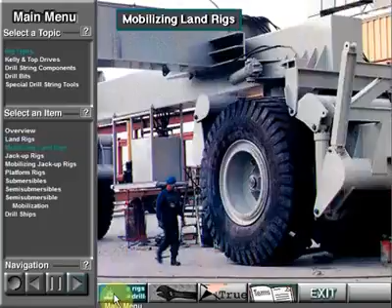Crew members can move land rigs on trucks, tractors, trailers, barges, helicopters, heavy rolling gear, skids, and, in rare cases, specialized air-pressurized equipment. Small, light-duty rigs are pretty simple to move. Ultra-heavy land rigs can be difficult to move.

A jackup rig drills offshore wells. It has legs that support a deck and hull. When positioned over the drilling site, the bottom of the legs rest on the seafloor. Jackup rigs can drill in water depths ranging from a few feet or meters up to more than 400 feet, over 120 meters.

Boats tow a jackup rig to a location with its legs up. Once the rig-up crew gets the legs firmly positioned on the bottom of the ocean, they can adjust and level the deck and hull height.

A platform rig is an immobile offshore structure. That is, once built, it never moves from the drill site. Companies drill several wells from the platform.

Platform rigs can be tender-assisted rigs. The tender floats next to the rigid platform, which is firmly pinned to the seafloor. Many platform rigs do not have a tender. They are so large that they are self-contained.

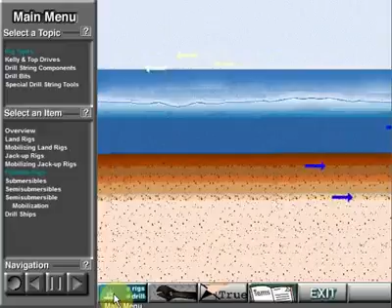Big platform rigs include the steel jacket platform, the caisson type, and the concrete gravity type. In deep water, rig builders have to make platforms that yield to water and wind movements. Two compliant platform rigs are the guyed tower and the tension leg.

A submersible rig rests on the seafloor when it is drilling. Workers flood compartments that cause the rig to submerge and rest on the bottom. When ready to move, workers remove the water from the compartments. This makes the rig float. Boats can then tow the rig to the next site.

Rig builders design submersibles to drill in shallow water and in water up to about 175 feet deep, a little over 50 meters. Submersible drilling rigs include the posted barge submersible, bottle-type submersible, and the Arctic submersible.

A semi-submersible rig is a floating offshore drilling rig. It has pontoons and columns. When flooded with water, the pontoons cause the unit to partially submerge to a predetermined depth. The working equipment is assembled on deck.

On the drill site, workers can either anchor the rig to the seafloor or use a system of thrusters and positioners to keep the rig over the hole. Here, they have it anchored. Crew members mount the wellhead and blowout preventers on the ocean floor.

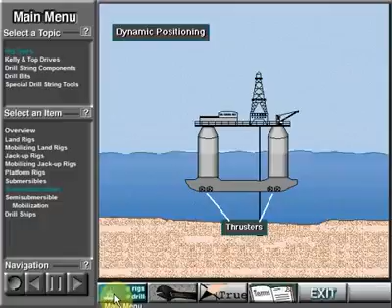Special hollow pipe, called riser pipe, connects the top of the blowout preventer to the rig. In some cases, the crew uses thrusters to keep the rig over the hole. Called dynamic positioning, the thrusters, which are connected to an onboard computer, keep the rig in position.

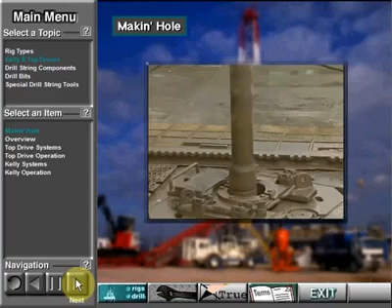To put the bit on the bottom, rig crew members screw it into a special pipe. The pipe is called the drill string. Crew members lower the drill string and attached bit into the hole.

For the bit to drill, surface rig equipment has to rotate it, unless it's rotated by a mud motor. Equipment also has to put weight on it to force the bit's teeth or cutters into the formation.

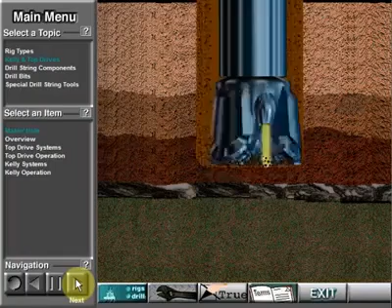As the bit rotates, a circulating fluid has to take the drill cuttings away from the bit. Otherwise, the hole would clog up. The fluid which circulates is called drilling mud.

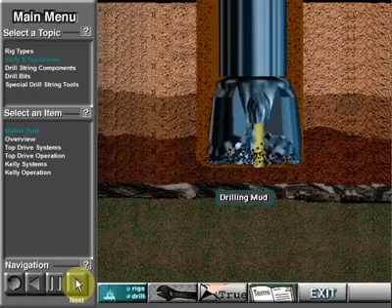To impart rotary motion to the drill string so that the bit can turn, either a top drive or a Kelly and rotary table system is used. Power is transferred from the surface down hole via the drill string.

Some rigs rotate the drill string with a top drive unit. Top drives are expensive, but very efficient. Crew members can add drill pipe joints to the drill string very quickly and safely, and they can drill the well more efficiently, with less chance of sticking the drill string in the hole as compared with a Kelly and rotary table.

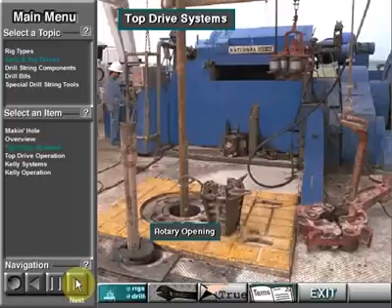A powerful motor turns a drive shaft, which is connected to the top drive. Crew members make up or attach the drill string to the drive shaft. The drive shaft turns the drill string and bit. Notice that the drill string goes through an opening in the rotary table. The table does not, however, rotate.

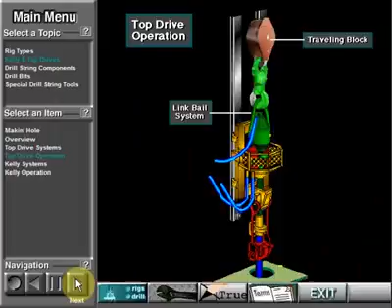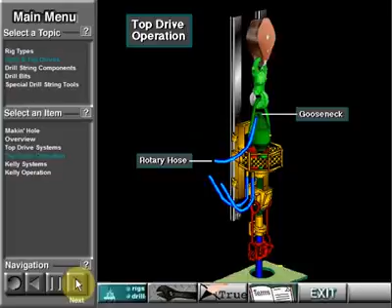A link bail system suspends the top drive unit from the rig's traveling block. Drilling mud enters the unit through the gooseneck to the rotary hose, the flexible line that conducts drilling mud from the pump.

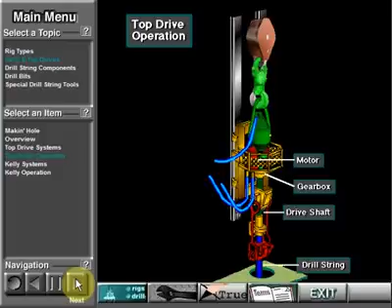A motor and gearbox power the main drive shaft. The crew makes up the drill string to the drive shaft.

The built-in inside blowout preventer, IBOP or safety valve, keeps fluids from backflowing up the drill string when the driller closes it. The crew uses the torque wrench assembly to make up and break out, connect and disconnect, the drill string.

The elevator links suspend the elevator. The rig crew latches the elevator around the drill string to allow the top drive unit to lift it up or down.

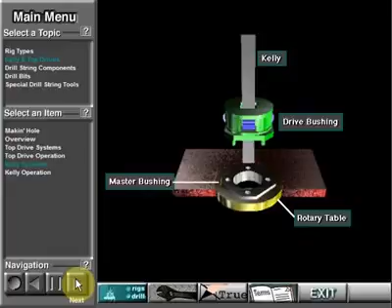A Kelly drive bushing, a master bushing, and a rotary table rotate the drill string and bit on some rigs. The Kelly is a heavy tubular device.

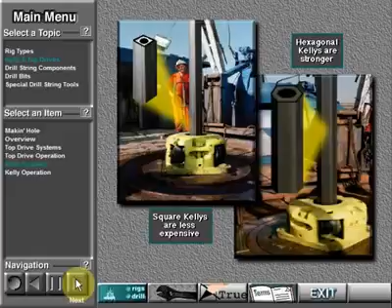It usually has either 4 or 6 sides. That is, it either has a square or hexagonal cross-section. Square Kellys are less expensive than hexagonal ones, but the hex Kellys are stronger, so rigs drilling deep holes often use them.

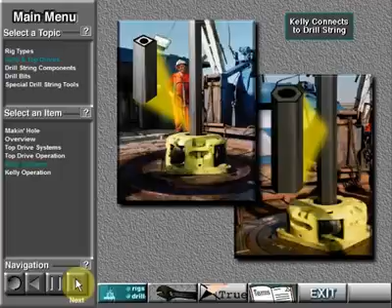Whether 4 or 6-sided, crew members attach or make up the Kelly to the top joint of pipe in the drill string. The Kelly, 4-sided or square in this example, moves through a square opening in the Kelly drive bushing.

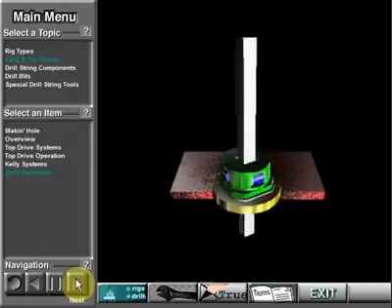The Kelly drive bushing mates with the master bushing, which the rotary table turns. This rotates the entire drill string and attached bit. The Kelly moves down as the...